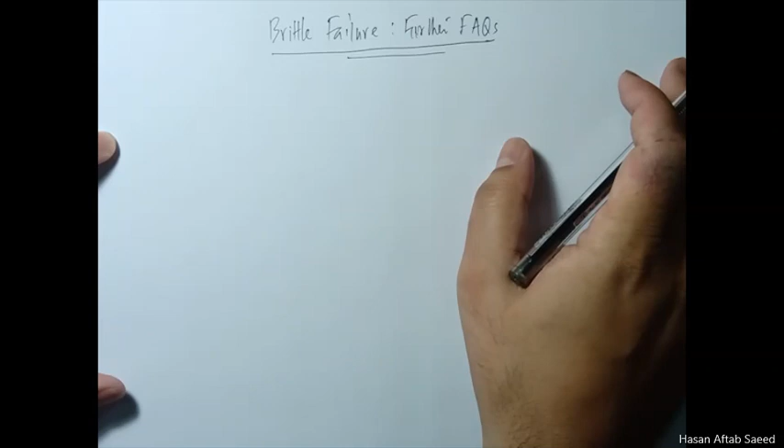Bismillahirrahmanirrahim. There are at least two more questions regarding brittle failure, and I thought it would be good if I answered them here. The first one is K1C, or the fracture toughness.

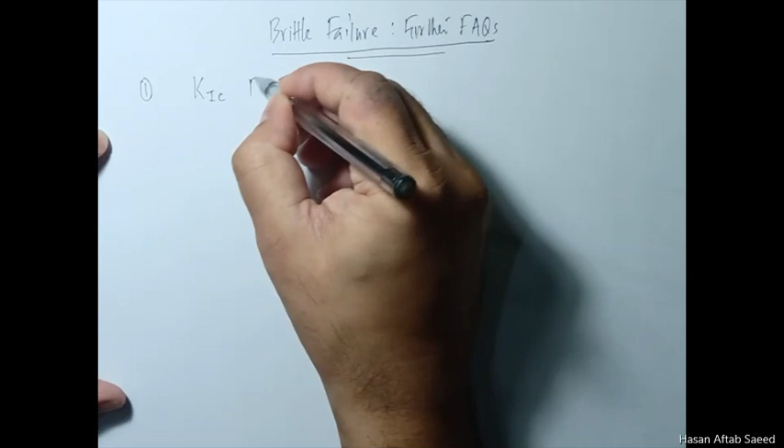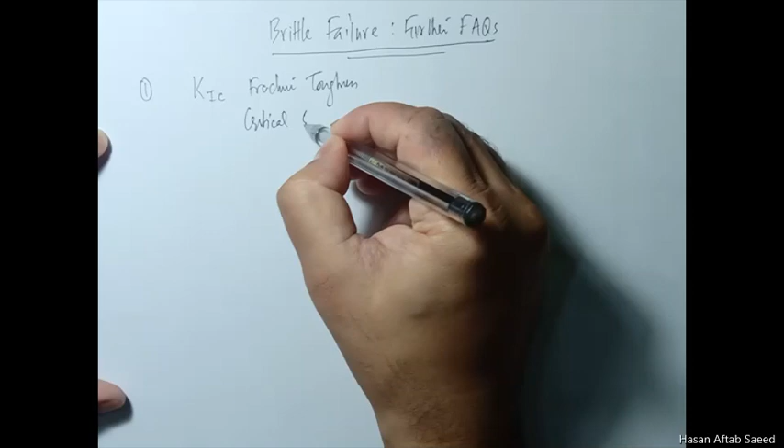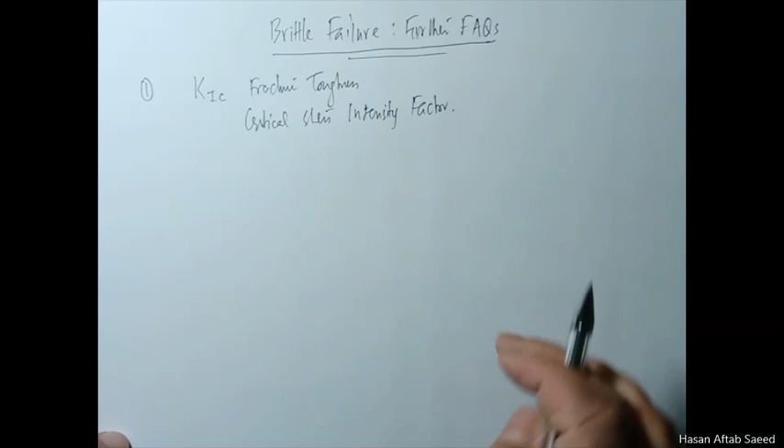Is it a material property? Fracture toughness is also called the critical stress intensity factor. So is it a material property? Well, the answer is yes and no.

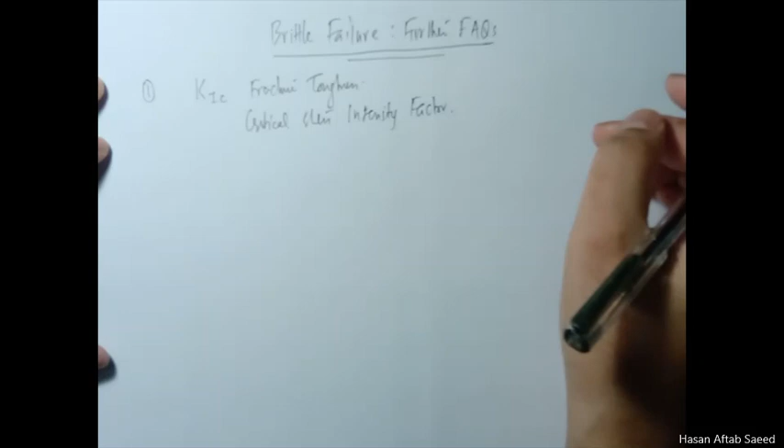It turns out that thin plates are tougher than thick plates. If you test a thin plate and subject it to the same stress levels as a thicker plate, the answers are different. The fracture toughness of thinner plates is higher.

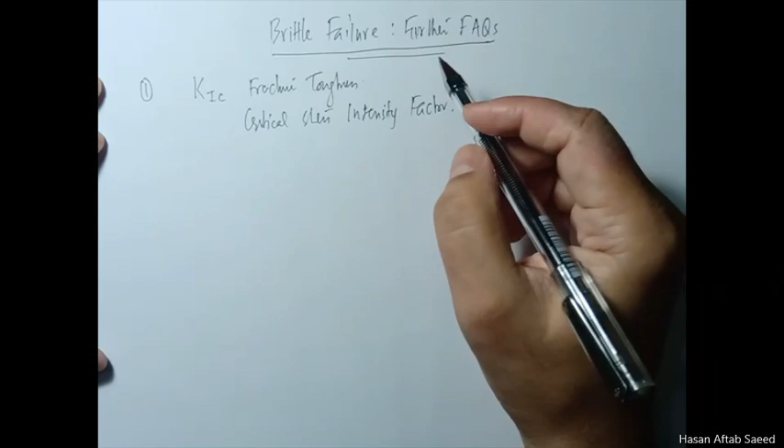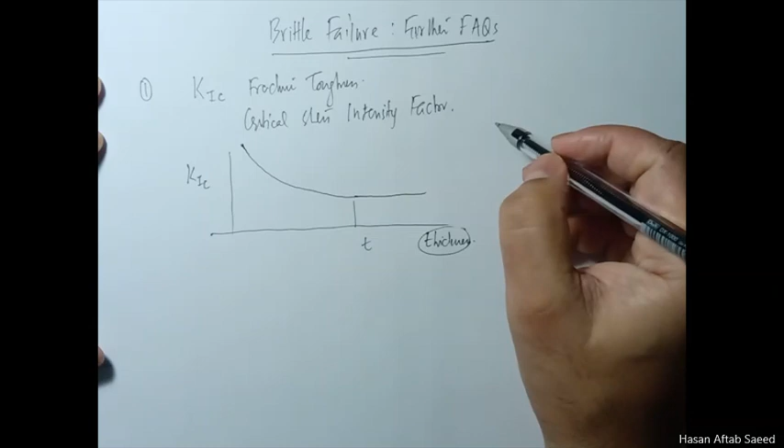So if you keep testing plates of increasing thickness, you'll get this kind of curve. This is thickness, and these are the K1C values you measure. After a certain thickness, it becomes constant.

At that thickness and bigger, K1C is a material property, and this is the so-called plane strain critical stress intensity factor. The literature reports these values. You cannot report all these values for different thicknesses. So if your situation has the same thickness as the value reported, you can use it directly.

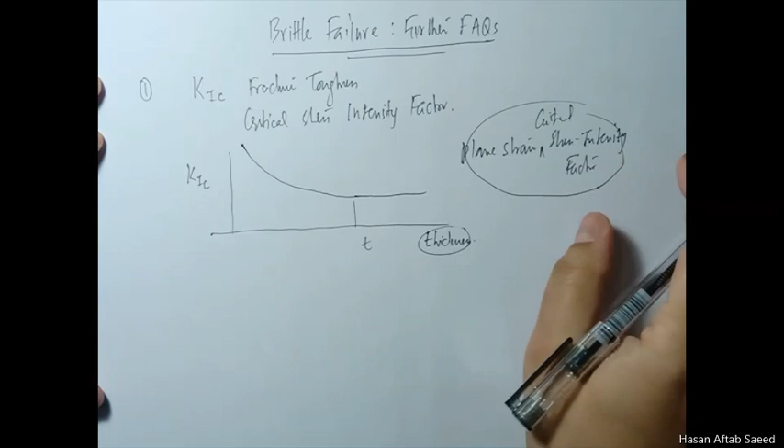But even if your thickness is less than that, and you have reports only in this thicker region, then one thing is obvious: even if you use that value, you are basically erring on the safe side. You won't be unpleasantly surprised, but it will result in an over-design.

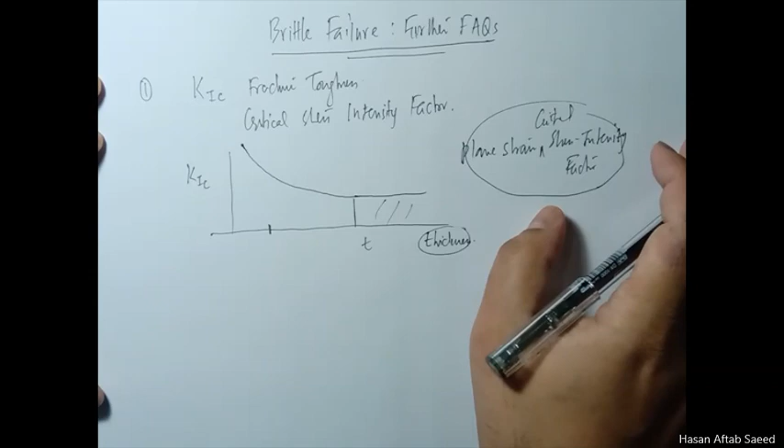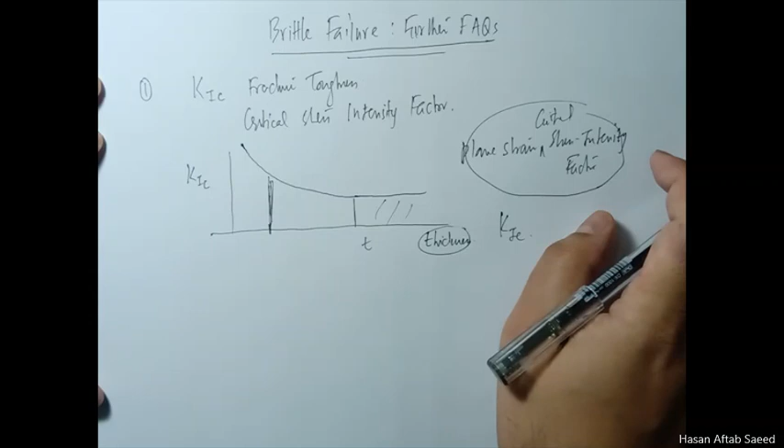So if you want to design in this thinner region, either you use the same plane strain K1C values meant for thicker plates, accepting a bigger factor of safety, or you can go for testing at your own thickness. Both options are open to you.

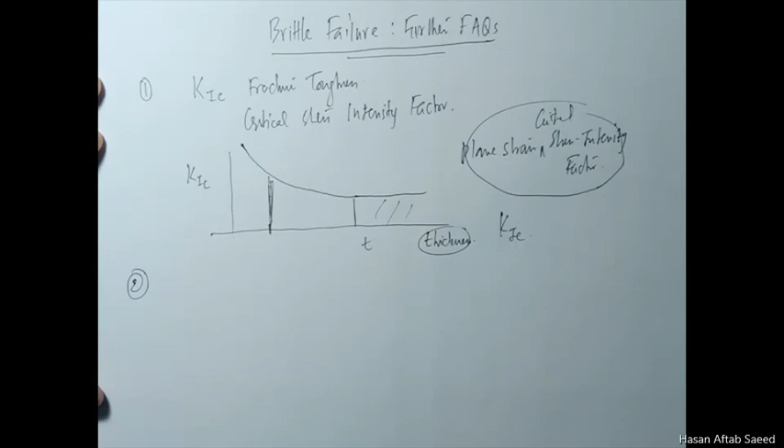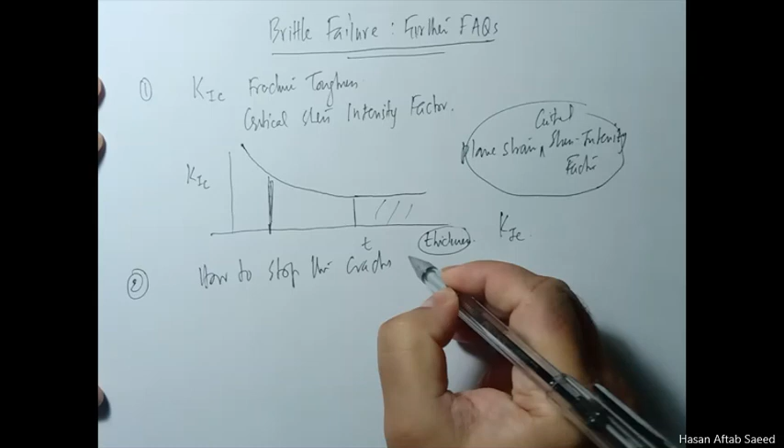The second question is: is there a way to reinforce material so as to stop cracks from propagating? Can we reinforce the material?

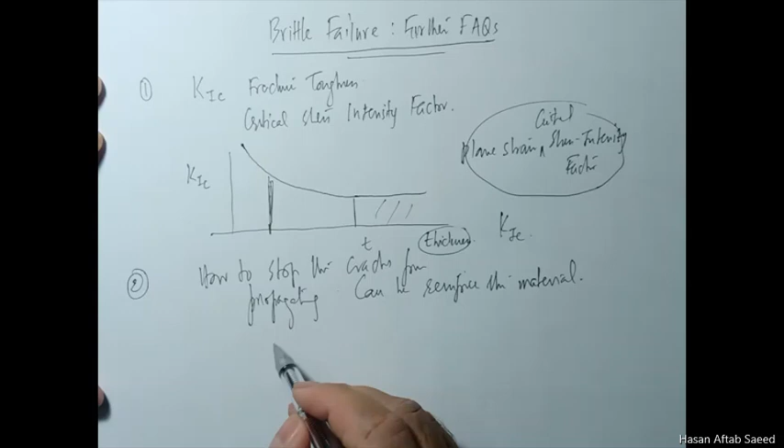Yes, we can. You may have heard about patches. Here the crack is extending in this direction. You apply a patch here, and you stop the crack from lengthening for a while. This is to delay the propagation of the crack.

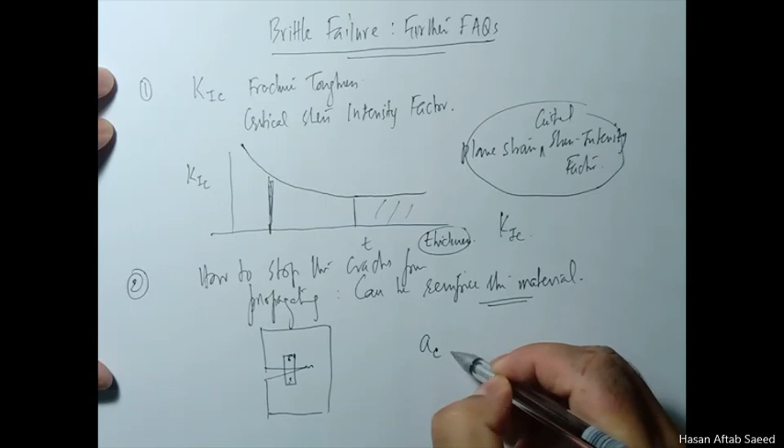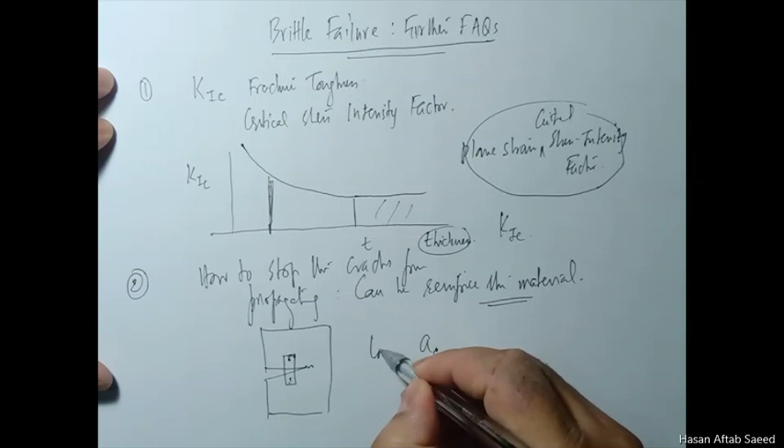This is one method, and for bodies in which the critical crack length is long, you can employ this method because you will notice the crack and have time to put reinforcement there. So for long critical crack lengths, that will depend on the material—it will most probably be a tough material, and stress levels will not be that high.

But when it comes to cracks with a critical crack length that is not that long, you won't have time for this sort of thing. In that case, you have to devise some mechanism already built into the body. For example, take the case of comparatively low stress, like the famous Liberty ships.

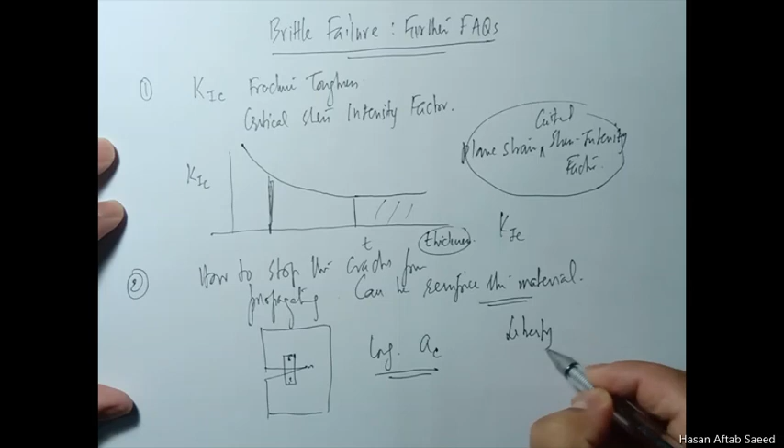The crack propagated, and every once in a while somebody—now this is like a patch, but instead you can blunt it. This is blunting of the crack tip by drilling a hole.

Now this is not exactly reinforcement of the material, but what you do is: this is the crack, and it has every likelihood to grow. You drill a hole here, so you remove the stress concentration, and this stops the crack from propagating for a while.

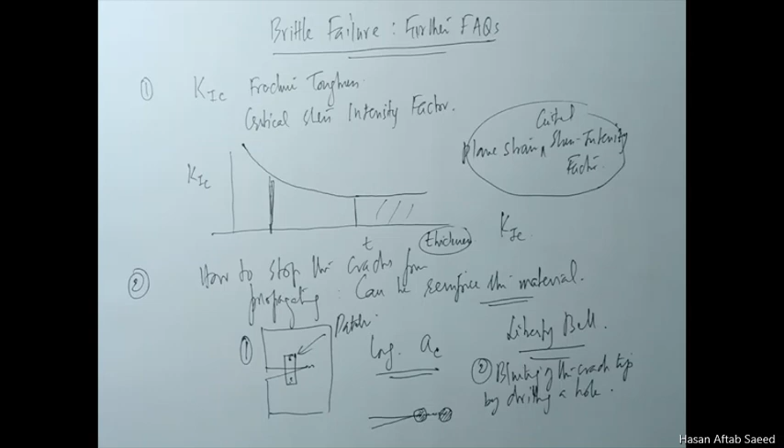Later on, after some time, it will start again, and then you have to drill another hole, and so on. So there's a limit to this kind of process, and the Liberty Bell has a number of holes—it's a very interesting study.

Now, this sort of thing was also noticed in the failure of ships: if the ships were riveted, the crack was flowing and there was a rivet hole there, and the rivet hole acted the same way. It was already there, but it blunted the crack, and oftentimes it stopped the crack.

Even if it starts and then changes its direction, and then there is another rivet hole and then it stops, so it delays the crack. Riveted ships had an advantage over welded ships. If the crack reaches the end of the bottom plate, that's all, it won't enter the upper plate because it's a different thing, not homogeneous, not joined together in that way. If it's welded, they're just one piece, so the crack just runs through. Many ships were saved because of rivet holes, but when they shifted to welding, there were a lot of surprises.

Now we know how to design properly, so you don't have to rely on rivets to stop cracks. But this is a concept you must know, because there are only two methods of making a system tough. One is if the system has a high work of fracture, and metals have it because they have dislocations. For non-metals, you don't have those mechanisms, but you have others. So either you use those mechanisms, or you make it difficult for the crack to propagate.

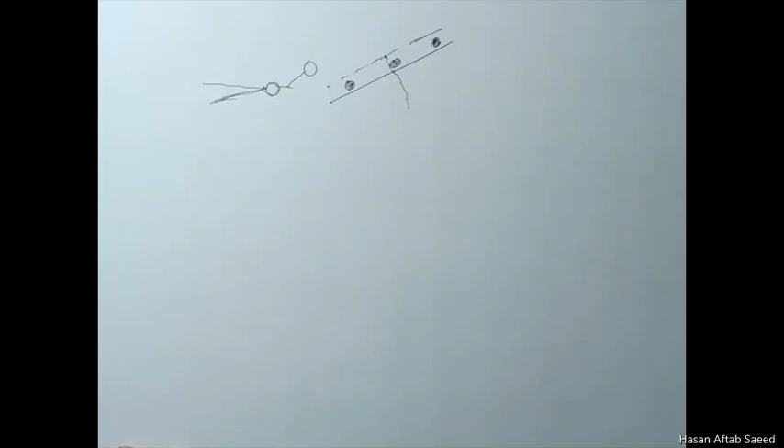One method is blunting of the crack tip. In non-metals, biological materials, or glass fiber materials, you don't let cracks propagate, and you achieve that by, instead of reinforcing the material, actually making it weaker. A homogeneous material is just like two plates welded together - basically just one plate. You have to have different phases in a system for your crack to stop. So non-metals, biological materials, glass fibers, carbon fibers, all utilize this sort of thing. This is the famous Gordon-Cook mechanism.

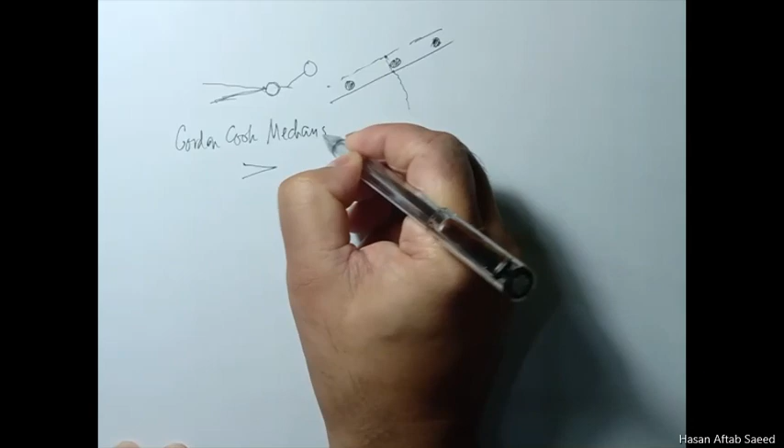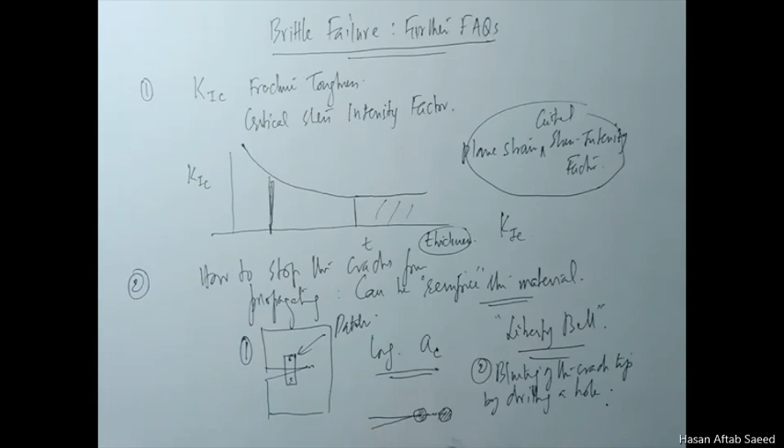We're talking about situations where you don't have time to put a patch there or keep drilling, because those are of less practical utility. You have to build this mechanism inside the material to start with, so that it takes care of itself.

So let's say this is a crack growing, its length increasing. Here's an interface - there's a matrix here and a fiber here. This fiber doesn't stop the crack because it's very strong; in fact, fibers are very brittle materials. What happens is, when the crack reaches this point, there's a high stress here, because this is an interface, a different material - unlike the homogeneous case of two steel plates welded together.

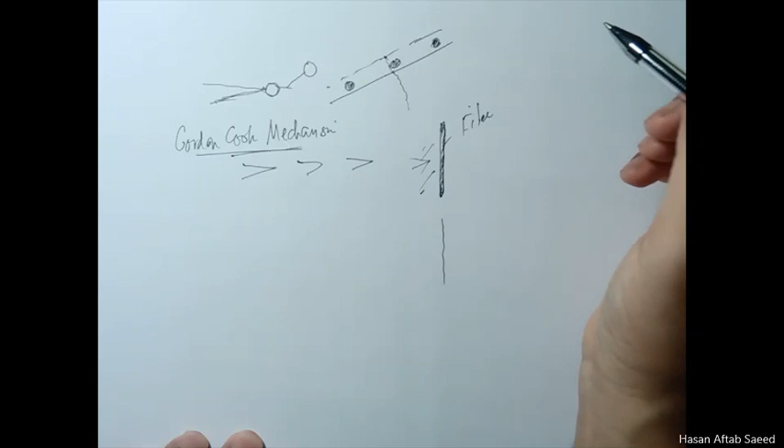That homogeneity is not a beneficial thing. Here, you need different weakness planes. If this plane is a plane of weakness, because the matrix and fiber are joined together but not that strong, the interface isn't that strong, there's a large stress here. When the crack reaches near this, the weakness opens up and blunts the crack. Not that it's very strong, but because the crack has lost its stress concentration, it stops, gets diverted, and goes into another direction where there's also a random fiber, and so on.

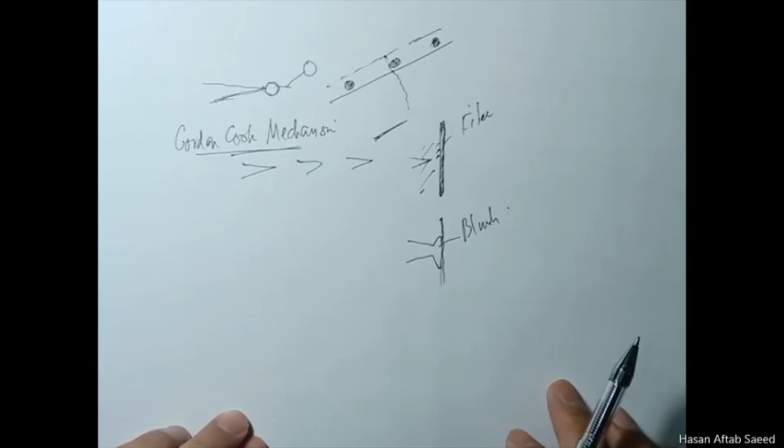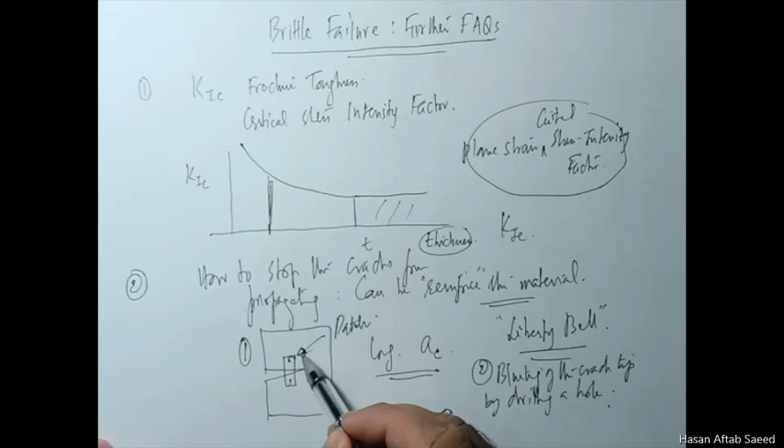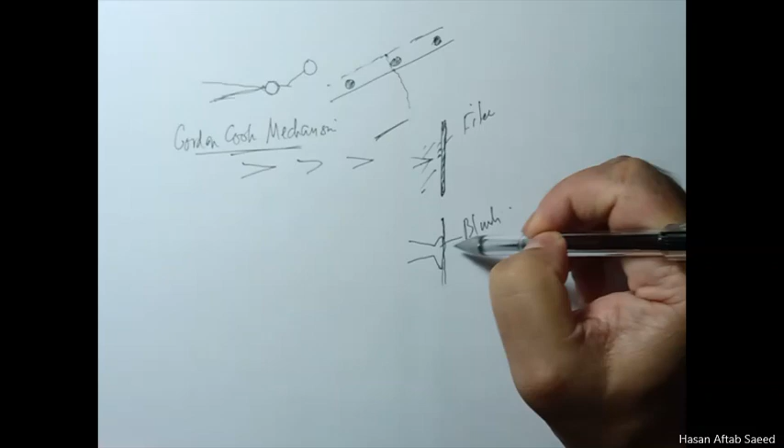So yes, you can reinforce, but reinforcing isn't always what we usually think of when we talk about reinforcing a material - oftentimes it's about making the material with some interfaces weaker compared to the rest, so it opens up the crack face and blunts it so it doesn't move any further. Thank you very much.